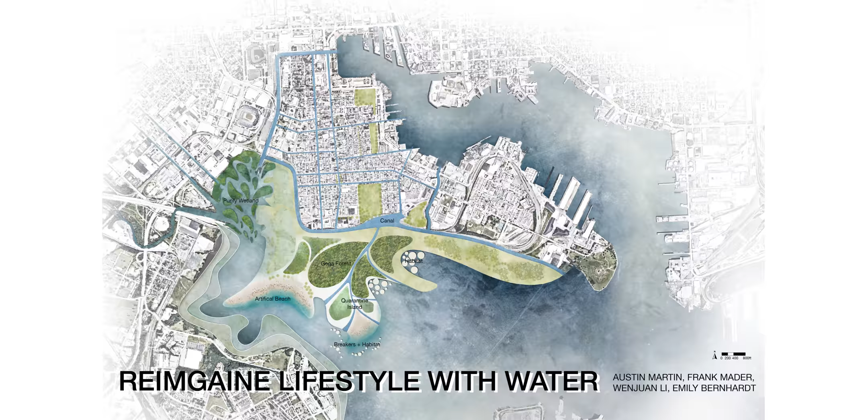Okay, so a crucial observation made by our team in the early stages of this project is Baltimore's susceptibility to flooding and inundation during storms and hurricanes. Looking at these areas through the lens of GIS data gave us a good understanding of where water levels are impacting Baltimore.

Using this base point coupled with forecasting outlined by the University of Maryland's Center for Environmental Science, these investigations have shown that with little or no intervention of increasing climate change around the world, Baltimore could potentially be impacted with daily flooding. Most areas close to the waterfront could see at least 15 to 20 feet of inundation every single day. This, of course, would occur with no steps taken to improve the global climate, and we'd like to think that planning for the worst outcome is the best way to treat these predictions.

So what does that mean looking visually at this map? The blue areas represent current hurricane inundations, which is probably outdated at this point, but the darkest areas represent greater than 10 feet of inundation, while the lightest areas are 3 feet or less.

The green buffer around these areas are what we predict to be the areas that will be completely underwater for up to 365 days out of the year in the year 2100 and beyond. This is also based on predictions that were published in 2018, which, given how we like to plan for the worst, is most likely now outdated.

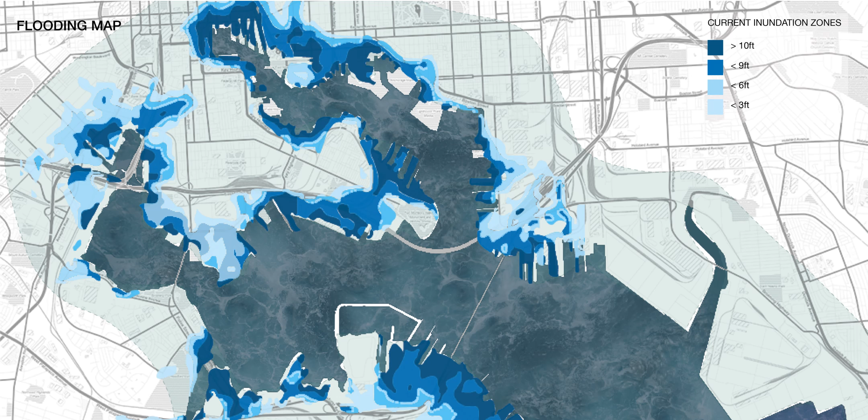Baltimore as a city has had a long history, which is something that can't be ignored. Making sure that Baltimore remains a culturally viable place for people to enjoy their life is something that should not be scrapped. A priority to consider is how the physical environment of Baltimore will change in the near future and how to maintain this habitat for humans as a home for future residents of Baltimore.

Another interesting and important data point to consider is how Baltimore's climate will shift in the next 100 years. It will most likely be more akin to southern Texas, and this is a crucial step to keep in mind as we plan for adapted life in the city.

Our schematic for this proposal looks at using ideas and concepts that can work together as a system, but also preserve a modular characteristic. Canals for improving an increasingly saturated urban core, adapted public space and landform for flexible and responsive human programming, and rich ecological kickstarts for immediate and prolonged protection comprise the schematic, which aims to re-envision how all walks of life interact with Baltimore.

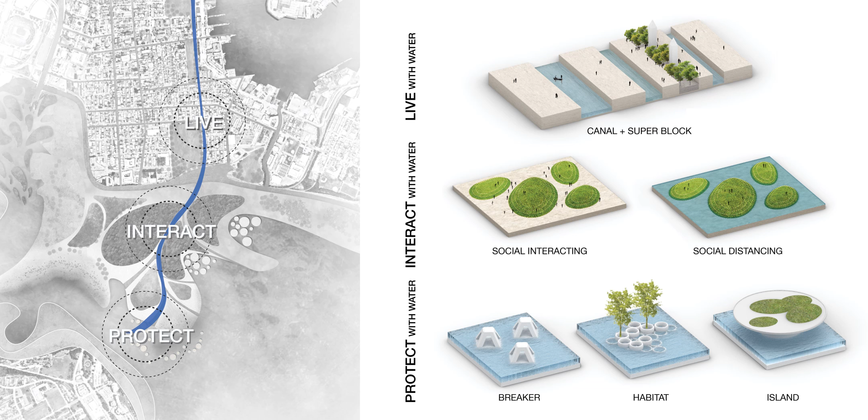In order to meet future obligations posed by sea level rise and plan for future pandemic outbreaks, the reimagined lifestyle alongside water will bring a new lifestyle that adapts to and accommodates changes in water level to Baltimore's urban realm. Water is an essential element that connects Baltimore from the coastal region of the Patapsco River to the more urbanized inland. Through this design, it is conceptualized for the 22nd century through urban, terrestrial, and aquatic habitat.

With the idea of protecting with water, interacting with water, and living with water, the slow landscape is intended to create a resilient, safe environment for residents in Baltimore. This project is intended to use the landscape to solve the problem of sea level rising and flooding, as well as public health issues in the era of a pandemic.

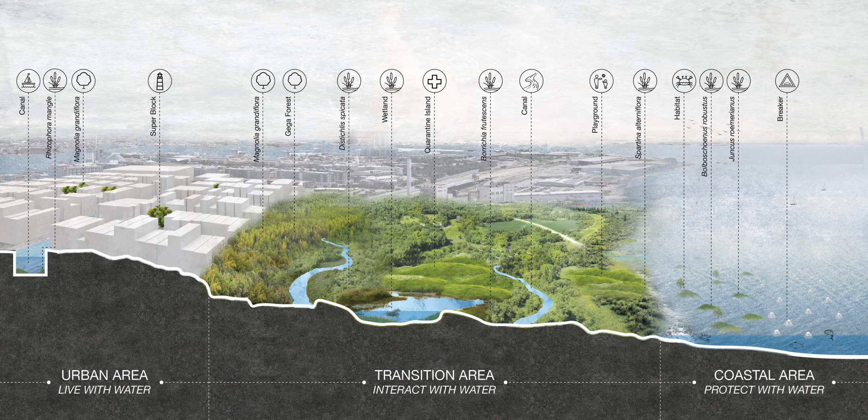Rather than using walls to block the rising of sea water outside, this proposal introduces a modular form of protection into the city and waterfronts of the Baltimore urban area. Recycled building material from the canal concepts are reprocessed into these modules that serve as a backbone for a regenerating ecosystem, as well as protect the urban coast of Baltimore from storm events.

The natural force of water is a dynamic that is aimed to be worked with in a synergistic way. Processes like erosion and deposition help to create natural habitats in an increasingly unnatural world. By returning waste construction material back to its foundations as stone and sediment, a reduction in new material production and meaningful public and ecological landscapes can be realized.

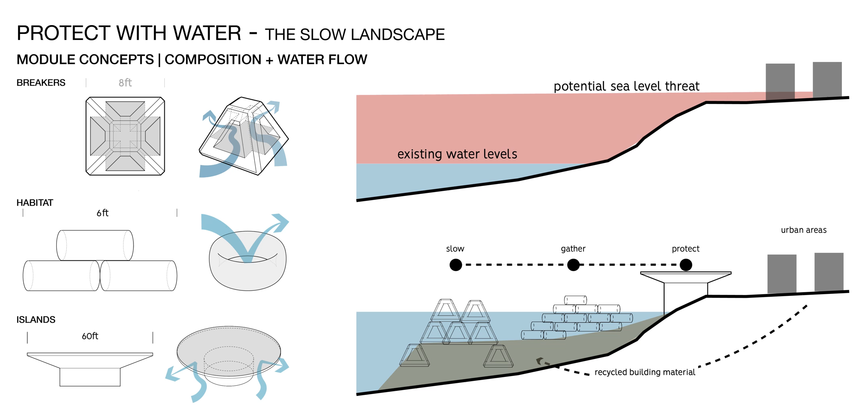Pushing beyond these popular seawall ideas of the 2000s, using newly adapted species of tropical plants like mangroves can offer protection and habitat to a growing floral and fauna population. Tried and true recycling wave breakers stop the strongest of wave forces and offer strong structural support for future human expanse into the now thriving Middle Branch restoration zone.

The foundational rings used to kickstart this waterfront restoration have served their purpose and have collected much-needed sediment to protect Baltimore's urban edge. With the mangrove population now serving as the anchor for this protection, many more species of plants are able to populate the new protective habitats around the Middle Branch.

Finally, deflection structures that serve as the last line of defense during the most intense surges and provide unique public space to refamiliarize people with an emerging waterfront habitat. The key principle throughout this design method is that the force of water is not something that can or should be walled off from urban areas. It is a force that must be worked with and influenced through design, which can be leveraged to create habitats for all walks of life.

The islands within Baltimore's growing urban forest play an important role in public health. Shifting the role between social interaction at normal time and social distancing during pandemics, the water and island together are an urban park that transforms into a quarantine landscape when called upon. This area is a transition from coastal to the urban, combining green island, public island, and water together into a whole landscape.

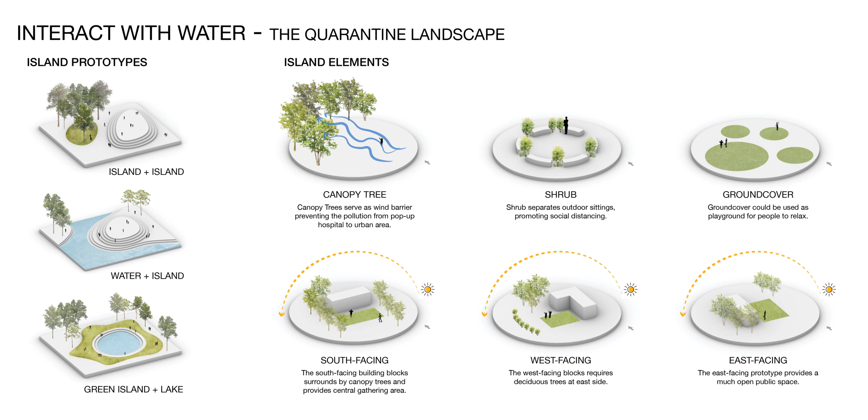One of the major differences between the natural landscape area and the area suited towards the pandemic is the pop-up hospital. These hospitals are made up of 9 foot by 9 foot by 9 foot modular box units. Based on patient numbers, the box could be combined freely into different layouts.

There are two sizes of the island in the quarantine landscape. The larger one is designed for the sick patients and is about 50,000 square meters, which could fit up to 1,000 hospital beds at maximum. Facilities such as the ICU or intensive care unit, the testing center, and hospital rooms are elements in the island of pop-up hospitals.

As for the smaller islands with the size of 30,000 square meters, 600 people with light symptoms could stay in these islands. The quarantine community is made up of these other quarantine rooms, which also have kitchens and gyms.

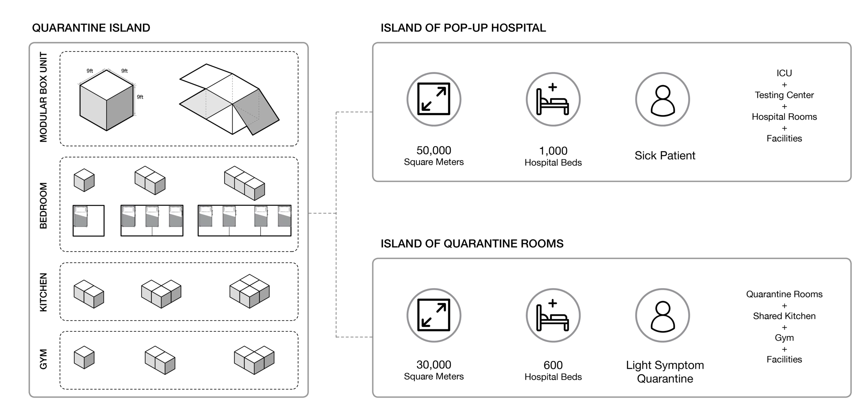The primary canals of the entire system accommodate the shipping of goods as well as large-scale public transportation. The secondary canals are weaved into the existing streetscape and have a balance between pedestrian traffic and small aquatic transportation. The tertiary canals create a robust ecosystem for aquatic life, with the addition of a tile design on the canal walls that can promote the growth of microorganisms. This new aquatic habitat can also act as a filter to cleanse the water as it travels through the canal system.

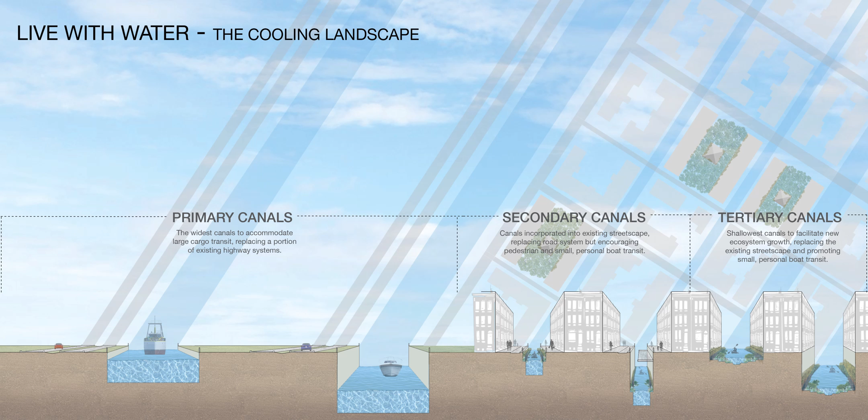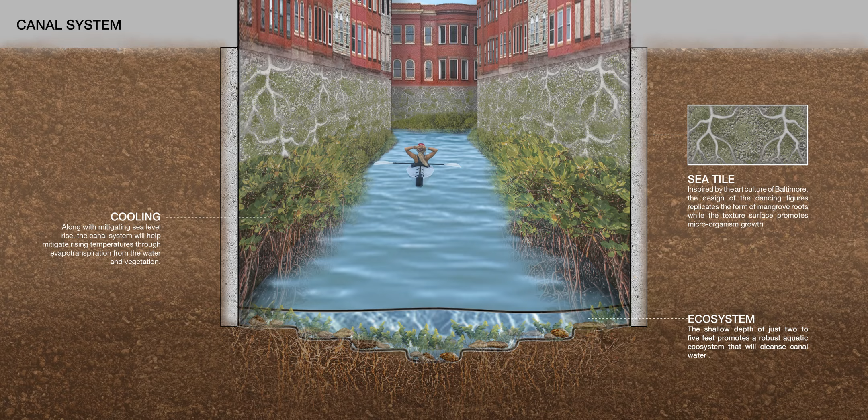The canals not only mitigate the effect of rising sea level, but also improve the lives of individuals living next to them. Introducing a system of canals would also combat urban heat island effect and increasing temperatures through the reduction of impervious surfaces, decreased emissions, and increased evapotranspiration.

The courtyard space within each row house block is modified to create a cool microclimate. The combination of tree canopies and wind towers cause the cool air that exists naturally over the canals to be constantly drawn through the space. The tree canopy combined with the existing row houses encloses the courtyard space, allowing the wind tower to function.

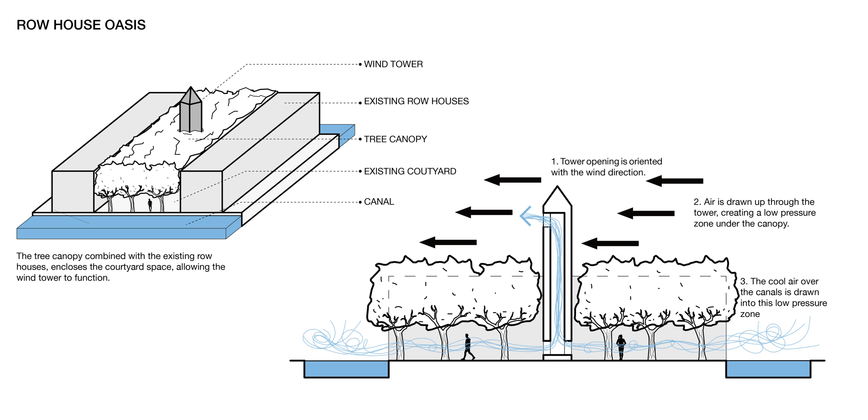The tower opening is oriented with the wind direction in order to draw air up through the tower, creating a low pressure zone under the canopy. The cool air over the canals is then drawn into this low pressure zone, cooling the space.